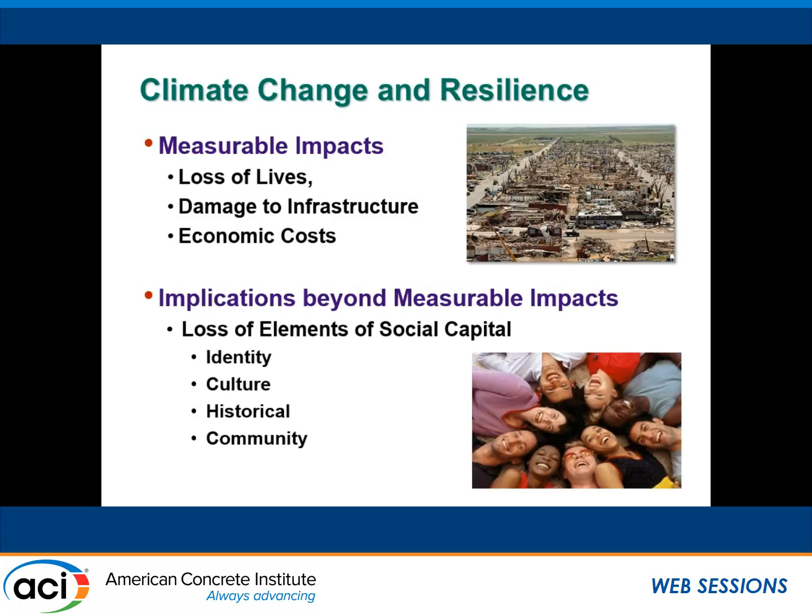And the only way to avoid that is to really be prepared for it. We've talked a little bit about resilience, but what is resilience to you? Resilience to me is really two things: it's resilience in your community, and it's resilience in your home and what you do day in and day out.

When we look at resilience, we've just heard about high-performance codes, how our codes need to change - it's to a minimum life safety. But we really haven't talked about materials. What materials should we be using to build our homes? We saw the cartoon about the straw house. We all grew up about the 3 little pigs - how did the wolf blow the house down? How did it stand? Well, when we talk about resiliency, it's a lot about the same thing.

How are you going to withstand the next natural disaster? We talk about what is good about resilience. When do you know you've reached resilience or a sustainable home? Once you have the disaster, how long is it going to take you to come back? How long, more so, is it going to take your community to return?

If yours is the only house standing on the block, and you used to be in a huge subdivision, I would not call that extremely resilient community housing. You're the only guy left there. So the house we see just standing in the background - what grocery store are they going to go to? What church are they going to go to? What hospital are they going to go to? They have to go hand in hand.

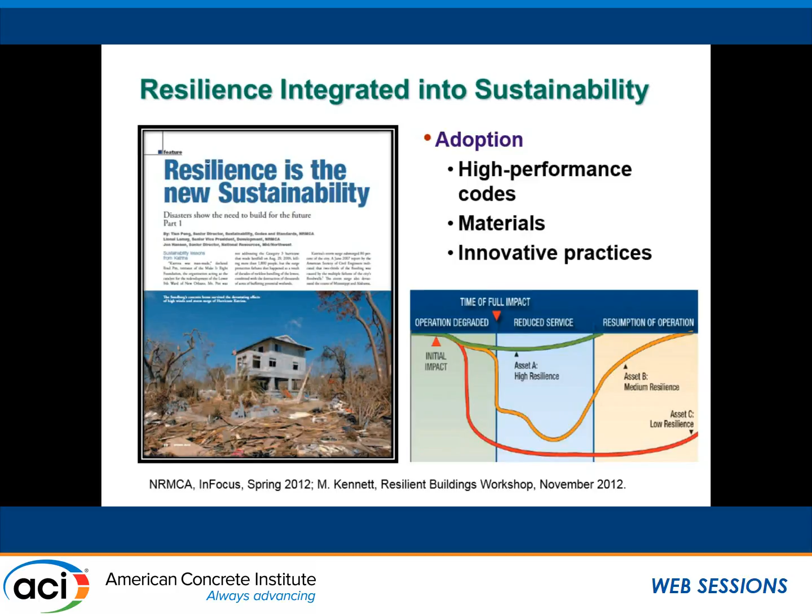So we'll talk a little bit more. I said there's community resilience and what I call functional resilience. Community resilience is when we take the whole package. If that bridge went out tomorrow and we can't get across to the grocery store, it's not a very resilient bridge, and we have to really beef up how we view our communities.

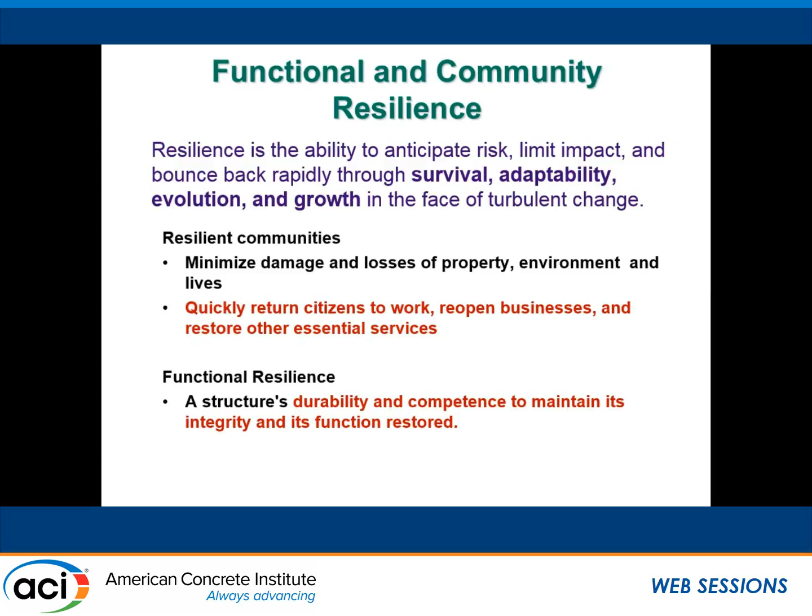But we also must think about the functional structure and the functional piece, and that is your house. When I look at infrastructure - and I'm going to use infrastructure today just talking about houses - the 3 things that we need to be aware of are how robust it is built, the resourcefulness, and the recovery that will occur once a natural disaster occurs. We need to build this in a way that is secure, durable, and resilient.

And I'm going to give you some examples. I'm going to try to give you some practical examples today of what is kind of resilient and sustainable, and the things and tools that you can take away. But more so, I want it to be thought-provoking for you and kind of give you some tools to think about.

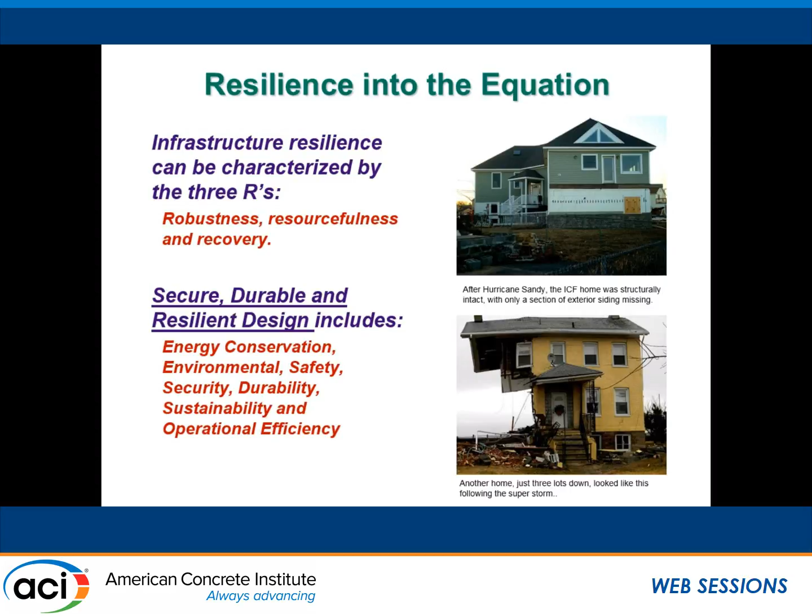Again, these were just three lots down from one another after Hurricane Sandy. I don't think he'll be going through the front door anytime soon. Here, they're going to come back. The neighborhood is probably going to be stripped down, but they can still go back home.

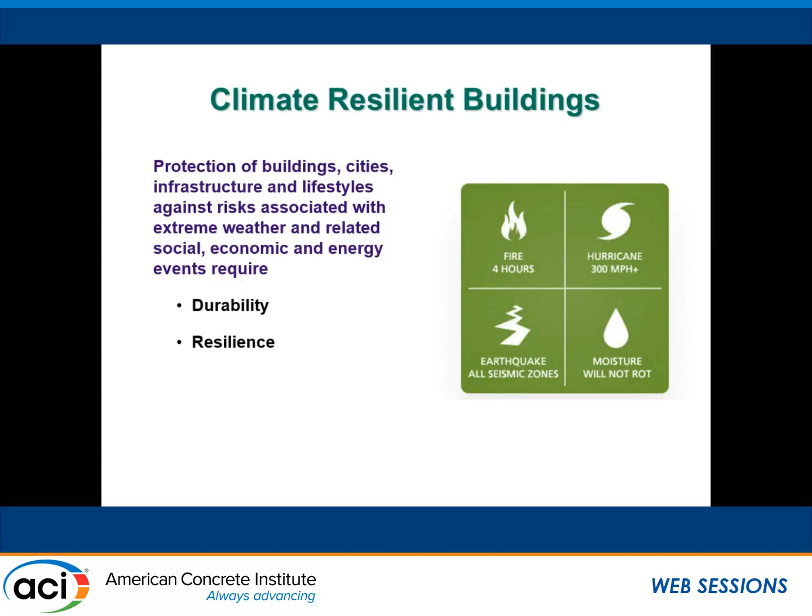I also look at sustainability. When we think about social capital, the things we think about are safety. It doesn't matter how well it's built to a LEED standard, but if you can't go back to it, it's really not a sustainable building. The most sustainable buildings are the ones you do not rebuild over and over again. So again, I'm going to look at things like durability and resilience, and these relate to disaster resistance.

Where are you going to go during and after your storm? Well, we know what happened here. It wasn't pretty. You know, George going home with mom and dad did not fare well. You just can't live in a hotel because now you're in a bubble, and it's going to get really expensive.

I've seen this many times: 'I'm going to live out of my car now because I've got nowhere else to go.' I've seen them live out of their boats, their mobile homes. Their houses are gone. But what happened to your capital, your investment? And it is your investment when you look at a home.

So again, we come back to society, your safety. We look at the environment, what's standing if it all has to go to landfill. And thirdly, monetarily, what's your investment?

You can utilize some of the strategies that are out here. I happen to like the Insurance Institute for Business and Home Safety. This is the Fortified program, and you can get a certificate. The LEED rating system is wonderful.

You have to be worried about energy efficiency to be sustainable, but I'm going to take you a step further. Are you sustainable off the grid? And there's a reason I ask that, when we look at how it relates back to climate change and resilience.

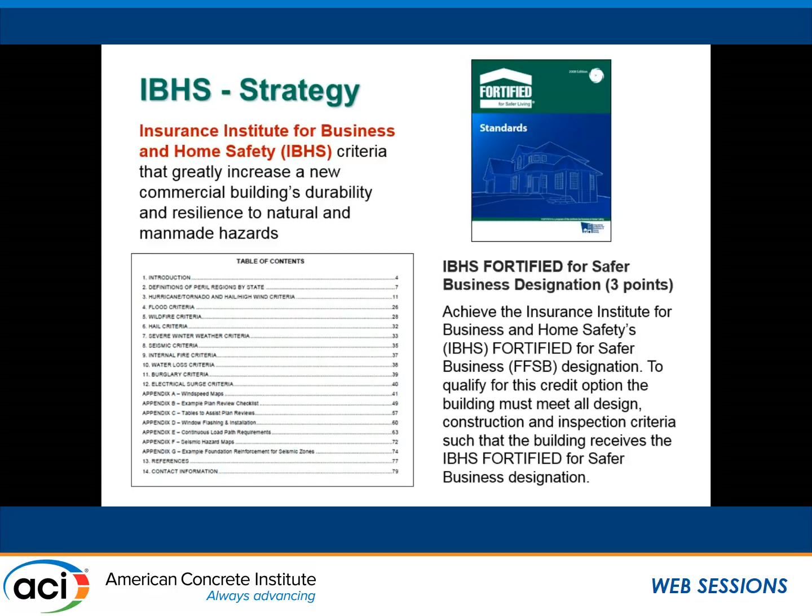Now, economically, we're talking about custom-built homes, but if you move into a home, some of these connections are only $1.57. I don't think it's going to hit your pocketbook too awfully hard, but it could be the difference between you coming back to your house and being able to live in it.

I looked at the internet last night because I'm like, okay, am I really off here when I say how affordable is this? The highest one was $50, but it was a very complex system. The cheapest ones were 99 cents. So if you think about your family and how much your family's worth to you, and you have to install maybe, let's say, 120 of them because you've got a pretty large area, that's 120 bucks. Last time I checked, your insurance premium is more than $120.

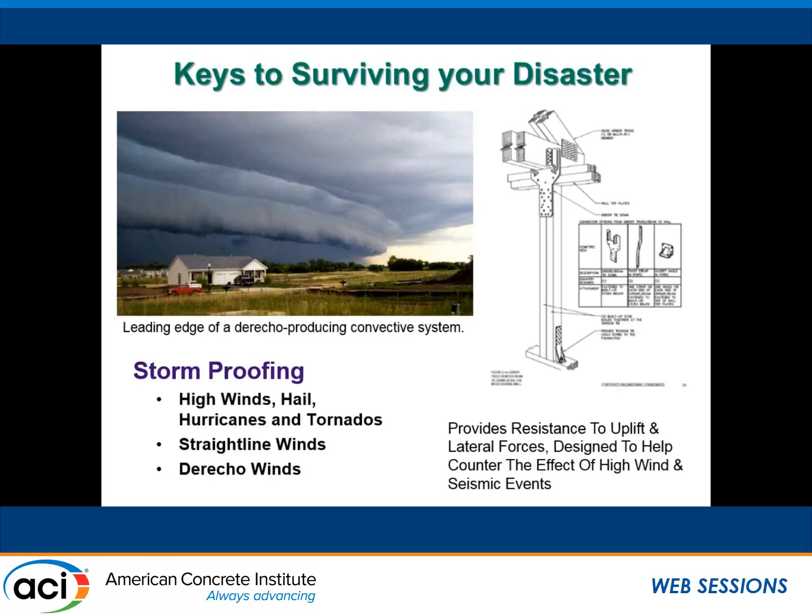What I find interesting about this safe room is, you know, they can make this look pretty glamorous actually. I can have a full-length closet, and it's made out of masonry, and I can still hang my clothes in it, and it's my safe room. And I can make it above ground, if just out here. I can make it below ground, or I can put it in the middle of my house.

But there are new concrete ways and technologies and finishes that can be used if you're going exteriorly. I'm not going to take away glory from a presentation later today.

They're going to tell you about how to build it. But these can look pretty darn sexy. They can look like your barn. They could look like your child's playhouse. There's a lot of ways that we can use concrete very, very efficiently.

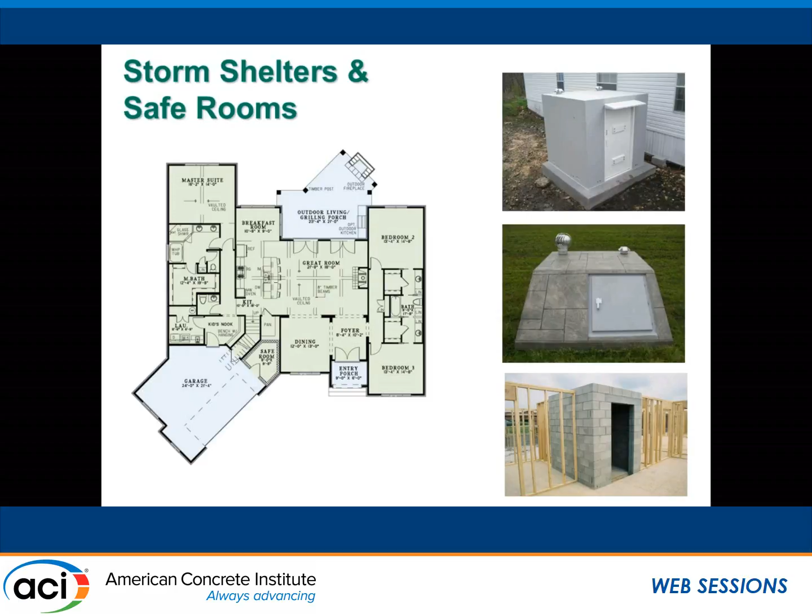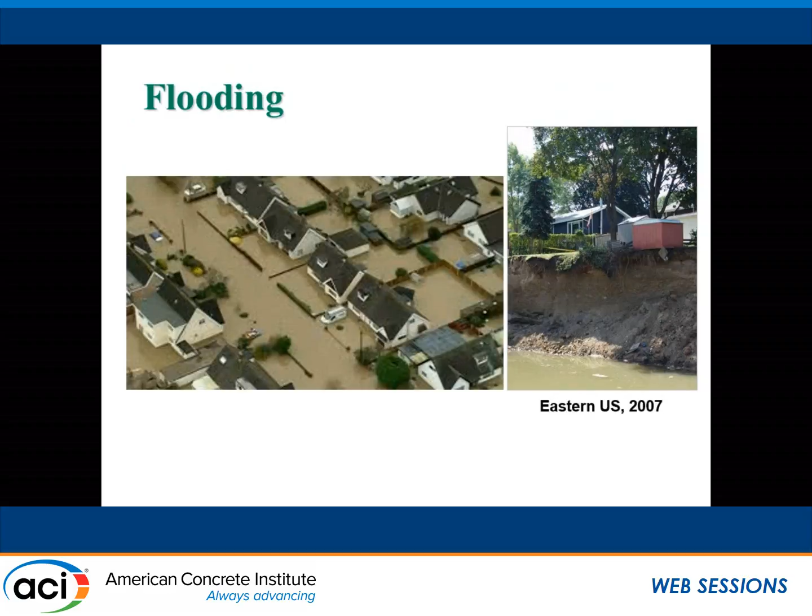Flooding. This was the eastern U.S. in 2007. Look at the erosion here. It's awful. Now, I'm not going to steal Ed's thunder, and of course, you've just seen this picture.

But FEMA has guidelines for coastal construction. We often see masonry or concrete, reinforced foundation walls, concrete piers - we call them concrete piles in many cases. But again, this was built to a FEMA standard. Now, this does not mean that you cannot make this even more grandioso. And you can see some of these designs on the internet, implementing additional sustainable type attributes.

You can add solar panels. Now, I ask you this because where's his power coming from right now? He's got no power coming in. It's going to be hot. How is he going to live off the grid? And this is where we must start looking at sustainable construction. How energy efficient is it? Where can we get our water from? What else can we do if we have to survive in that particular structure?

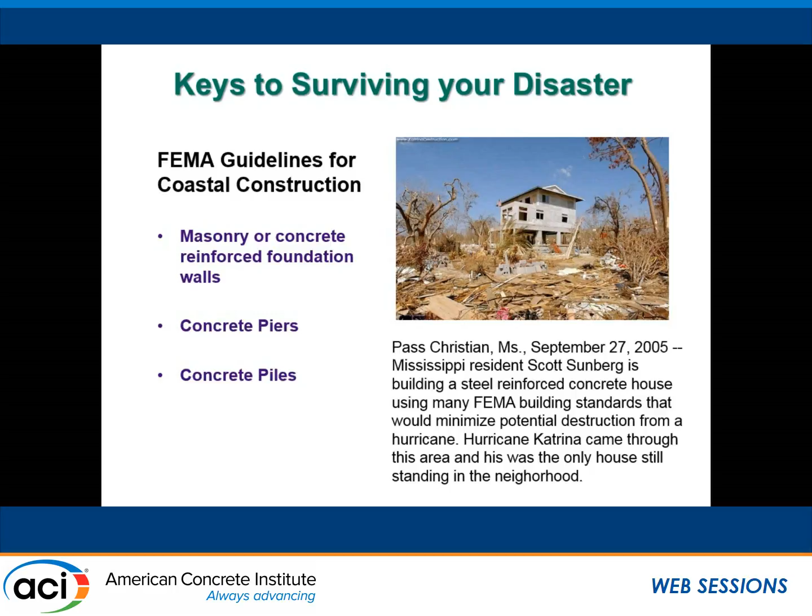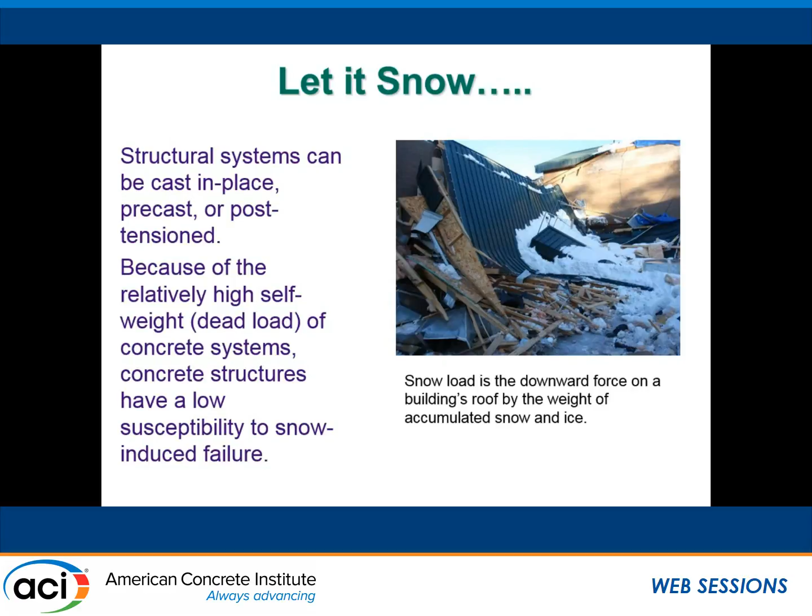Here's another example of snow load. And you're going to see where I'm going with this in a second. How many people lost power? And if you live in the north, you know what I'm talking about in Buffalo, Boston, Ohio, Pennsylvania - somebody lost power. My question here is, if you do not design for this correctly, it's going to fall down. You can use precast and other post-tension systems, but more importantly, when we talk about power outages, how are you going to survive the power outage?

There's a very interesting video online that talks about: I'm on a back road, way back nowhere, I'm in my vacation home, and I've gone skiing in the mountains, and the power goes out. How do I stay warm? Are you going to be able to stay warm? Well, with sustainable construction, we think about those things.

But think of it the other way - if I have to lose temperature. An example is, in Chicago, a colleague of mine lost power. She lives in a home that is actually an apartment building that is brick, and she said she lost power for 5 days. The temperatures outside were 20 to 30 degrees Fahrenheit. She said that even though she lost power, she started at about 75 degrees internal temperature. At the end of the week, she was still at 55 degrees, 50 degrees. She could survive with a coat on. But that's because of the kind of construction she thought about.

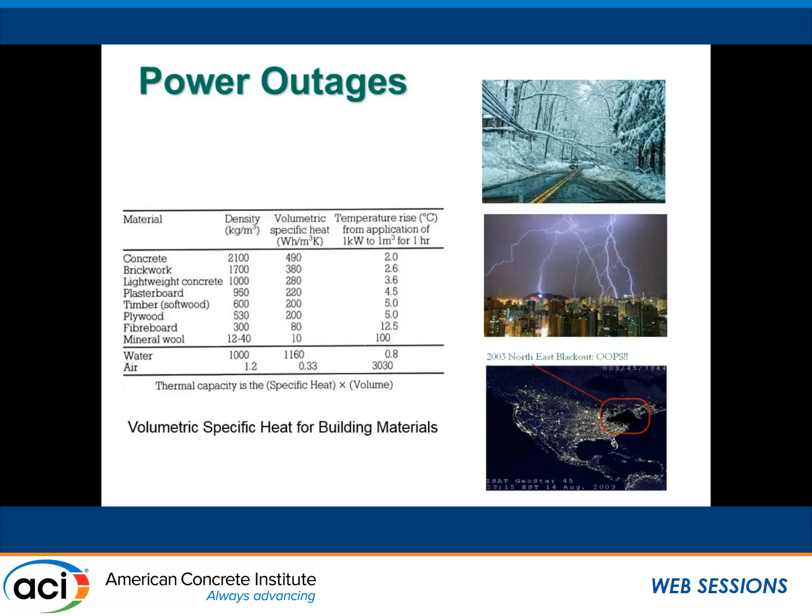And knowing that thermal mass makes a difference. Thermal mass is part of the reasons we look at energy. We can design for thermal mass examples. Here's a case where we're building our home, and we might want to look at solar gain.

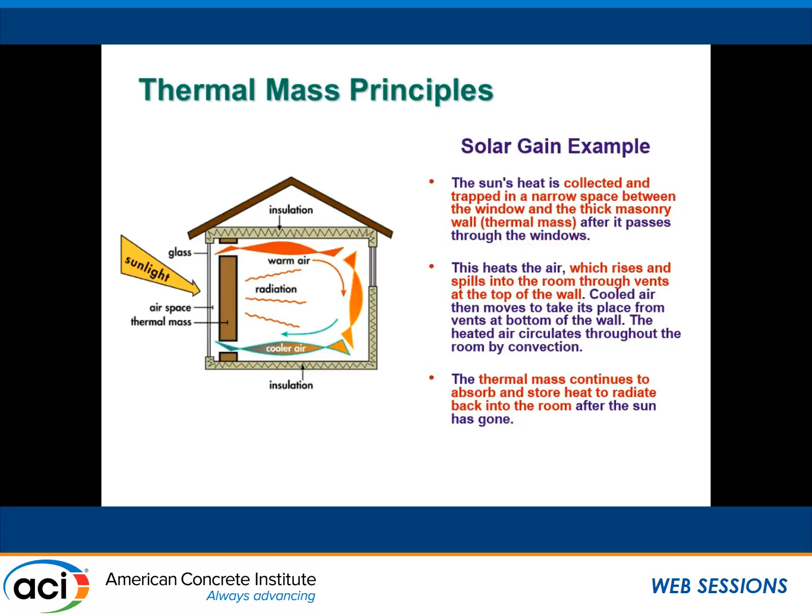This is a passive design in which during the winter, there's not going to be a tree here, and the sunlight's going to come in, and you basically have some thermal mass here, so your brick wall. You can bring in the air, and it can be circulated, and you'll continue to absorb and store heat even if your power goes out.

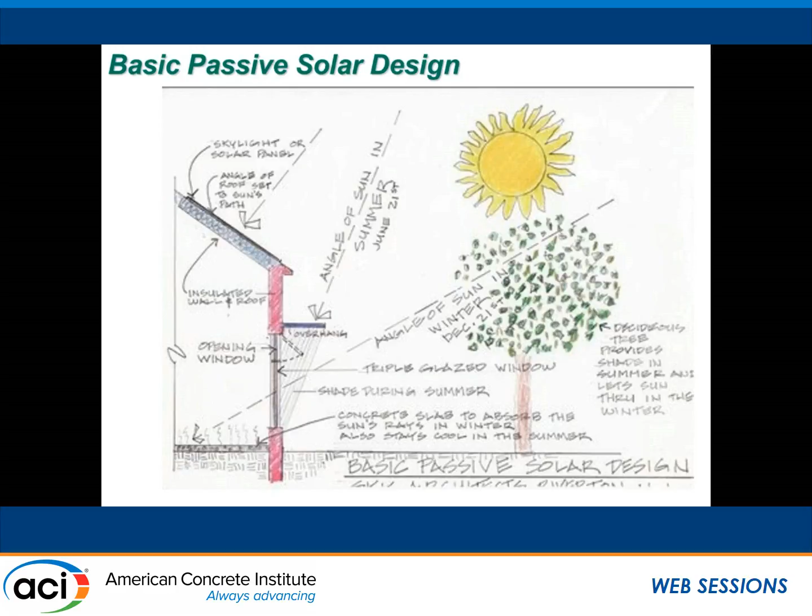Here's the example, just a little rendering. Basic solar design, again this is summertime. We've got the tree, we've got it opening the window, we've got some skylights coming in. This looks nothing more than a sunroom off the back of my house. The difference is that I've got skylights, I've got a concrete slab, which is providing my thermal mass in this occasion. You notice I still have windows to look out. It's not ugly, it's just not all concrete brick walls. But again, this is allowing some passive solar design.

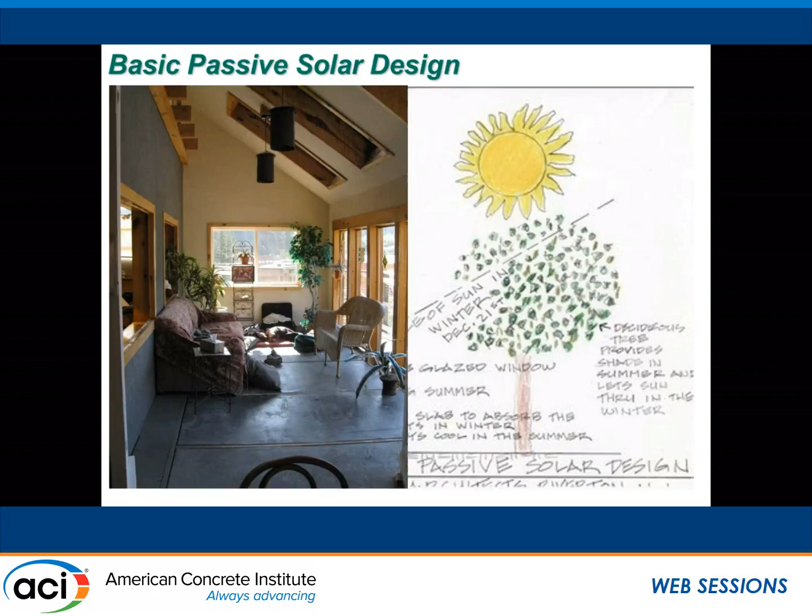So when we design for sustainable construction and also now for resilient events, these are some of the designs we might employ. We talk about earthquake resistance, and certainly there are guides out there by FEMA documentation, but the key here is it's above code. And we can do sustainable construction above code. A lot of people say, well, I'm using so many recycled materials it can't possibly meet code. When we use fly ash, silica fume, slag cement in our concrete mixtures, we typically are at compressive strengths that are higher than ordinary Portland cement mixtures.

We also must think about how well we're using our aggregates. I've never seen where I can not use a slag aggregate or a recycled concrete aggregate. You might lose a little strength, but you're still going to be able to produce a very good quality concrete.

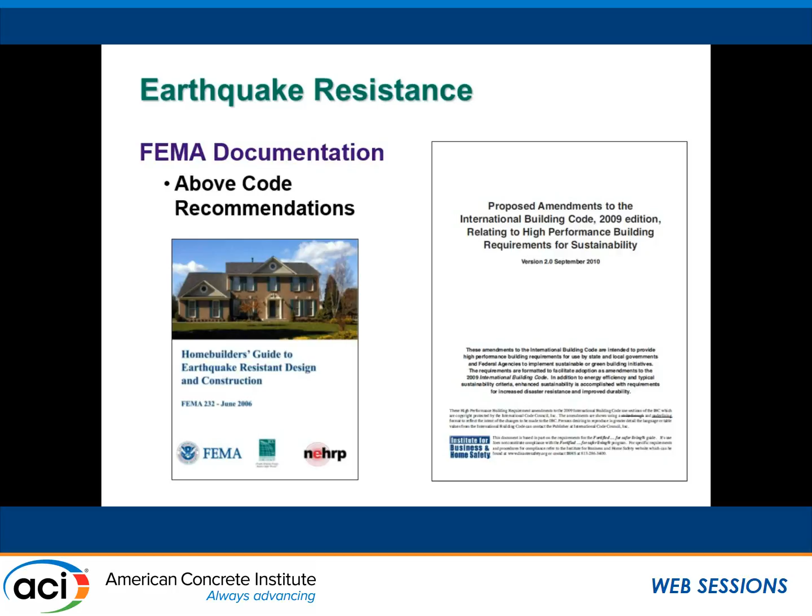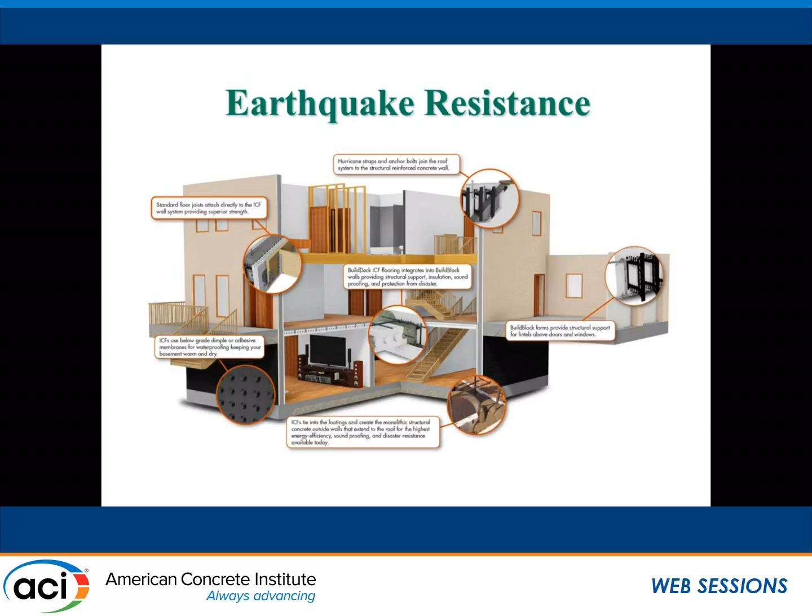This is just some earthquake resistance. This is an ICF type home, just a rendering I took off the internet. But we can see the connections and how the connections are well built. Again, as was said, when you have a catastrophic event, you typically have several things happening at the same time. It's not just the earthquake, it's the fire in the earthquake. It's not just the hurricane, it's the hurricane and the water and the flooding that all occurs. So really a lot of the design that you see out there is energy efficiency with connections, with waterproofing, so that you can survive these events.

The next one is fire resistance. I've been watching the news while I'm here in Kansas City. I have seen 3 fires in 3 days. What concerns me about this, I'm going to relate a personal story to you. When I was in college, I lived in one of the apartments that college students live in. I didn't think anything of it. It was actually on the ground. This is not a picture of it.

This is wood construction. This is in New Jersey, occurred just a couple of weeks ago. It had fire sprinklers in it. The fire sprinklers were working. Do you think anybody's returning to that structure?

No, everything's lost. In college, again, I lived on a concrete slab. It actually had firewall separation between the apartments. They were cinder block. My neighbor decided at 12:30, after being out with friends like young men do, he got hungry, got the munchies, said I'm going to make French fries. Puts the grease on the stove and falls asleep. I hear my fire alarms go off.

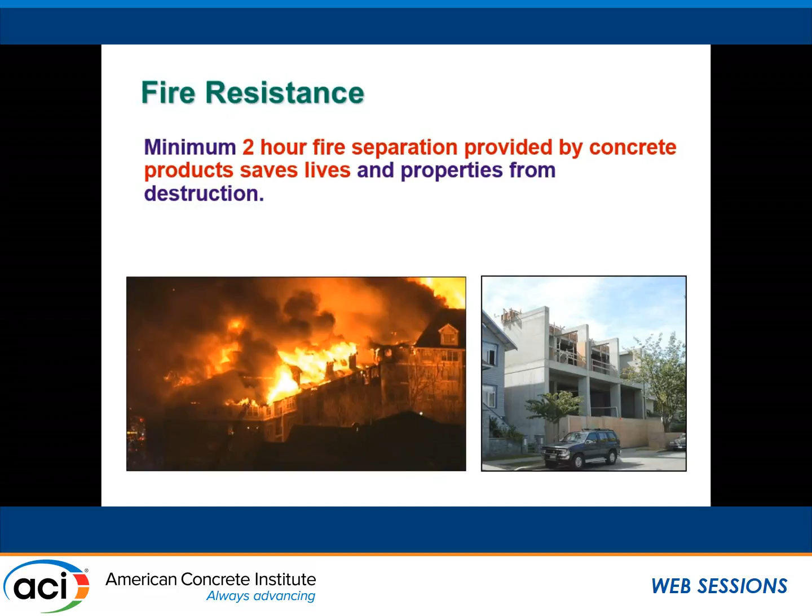They lived very close to me. They lived in a home with beautiful wood shake shingles, beautiful cedar siding, and a lot of mulch, very nicely landscaped. Only one problem: the husband liked to smoke, and his wife said, honey, you're not smoking inside this house, we just got everything repainted. So he went outside on Christmas Day. Family was there, he went out, smoked, put it out. Guess where he threw it? In the mulch. They woke up the day after Christmas to their house on fire.

So when we build, there's a couple things. Not only do we have to think about the structure, we have to think about the landscaping around the structure. Typically, when we look at sustainable construction and sustainable landscaping, we're looking at native plants.

We also look at things that we can use concrete for. Today, there's a lot of entertainment that goes on at home, so you have patios, slabs, all of these things. When you design and think about using plant and aquatic life, you really need to think about 100 feet around your home as your protection zone.

When we saw some of these forest fires and look at those houses and how they're landscaped, some of them use sustainable landscaping which meets a sustainable sites rating system. You notice I don't have a lot of material here that's going to burn. I have room between the house and where the brush is.

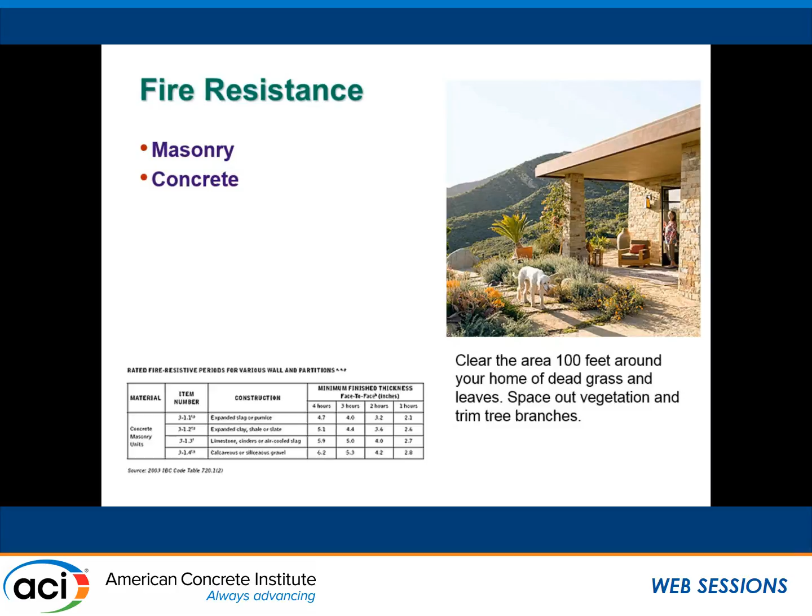There's a lot of innovative solutions out there that we may not think about when we consider the construction of our homes. We can think of superstructures, things like semi-precast double wall, hollow core columns, watertight concrete renovation. Ultra-high performance concrete is way out there, but if we're doing a facade of, say, an apartment or multifamily residential, we might be able to use it in different ways.

We need thermal solutions or vertical villages. We also have adaptive housing.

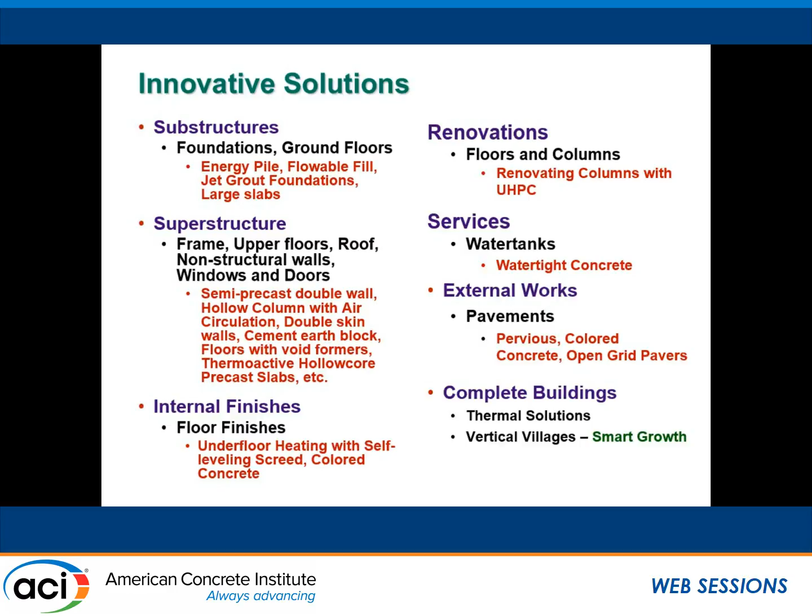So what I challenge you to do today, when we think about sustainable housing, is think about your pavements and your building facades. How energy efficient are they? Think about your envelope design. Is it energy efficient? Can you withstand that snowstorm that's going to leave you without power?

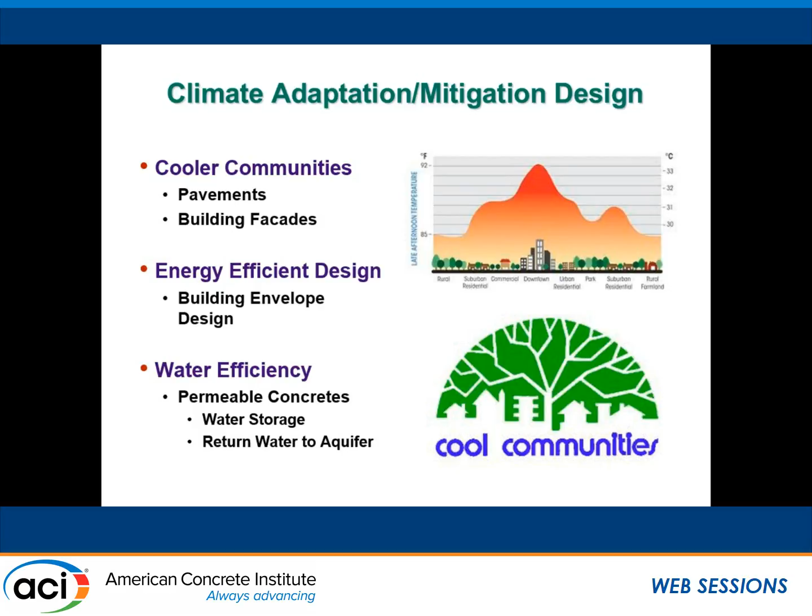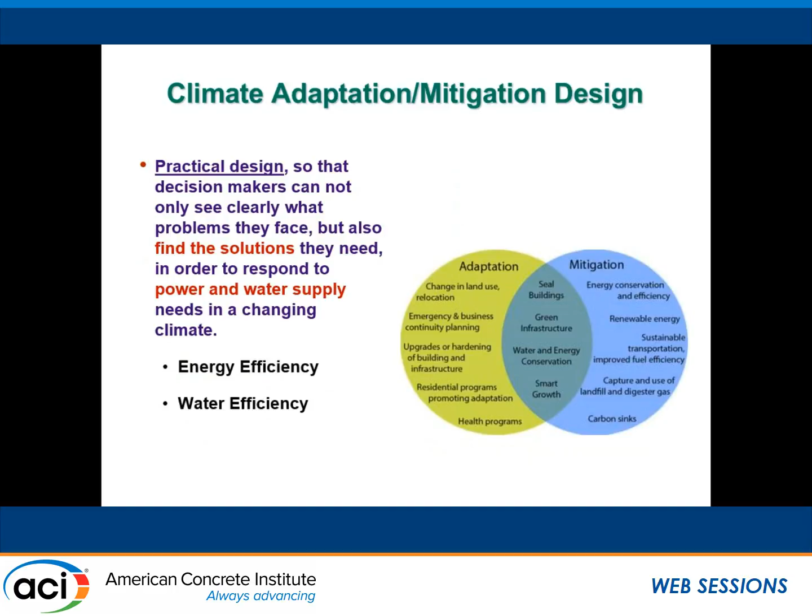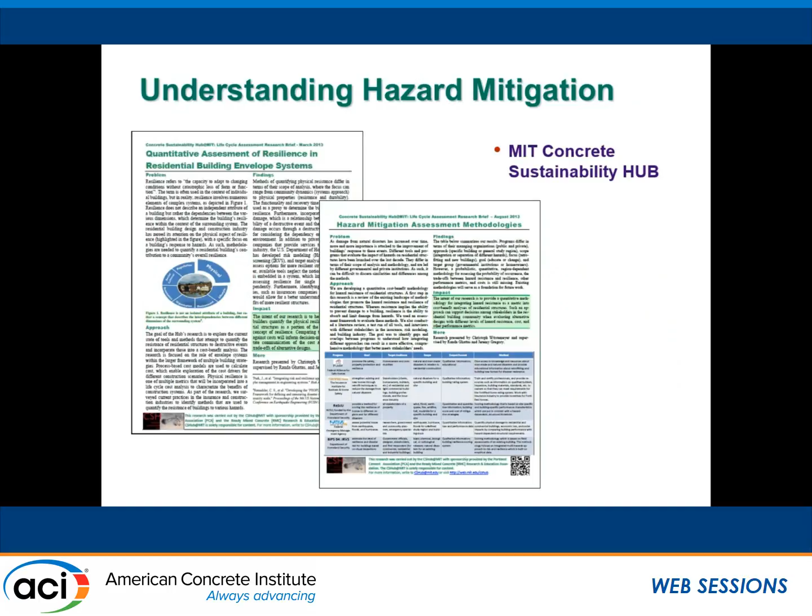There are some documents out there I invite you to look at on the web. The MIT Concrete Sustainability Hub, and Reed's going to be talking about this, covers hazard mitigation assessment methodologies. There's a lot of areas where you can get information about resilient housing: FLASH, FEMA, CARI, Rescue, IBHS, National Institute of Building Sciences, the mitigation movement. You can also follow LEED for Homes, and there are other rating systems out there too.

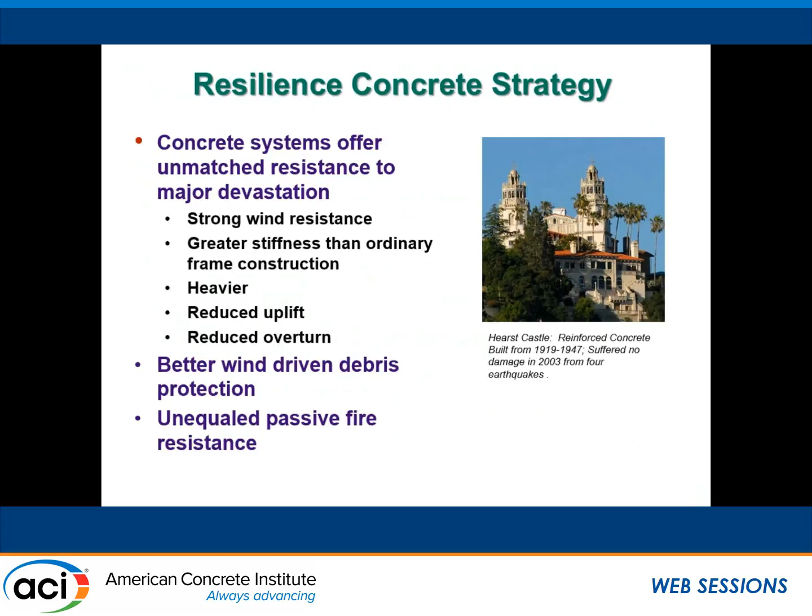Realize that concrete offers you strategies, similar to what Steve had said before, including unequaled passive fire resistance. During that storm, your neighbor's 2x4s may be flying, but you don't want them going through your living room wall. So let's build appropriately. Thank you.